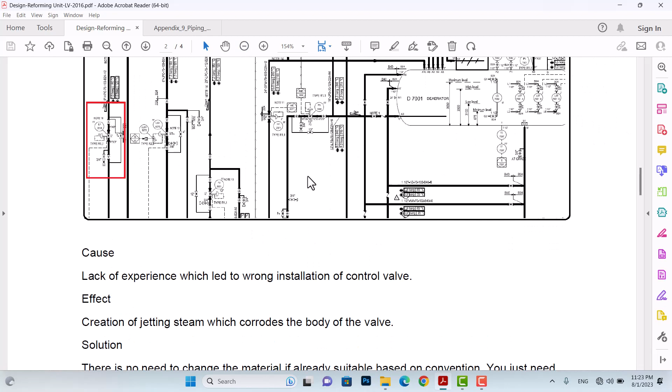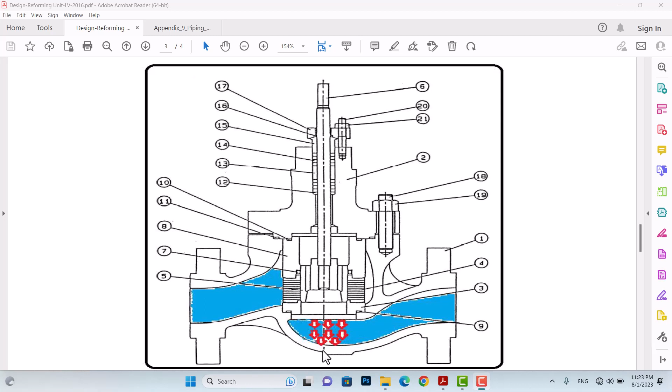You see, this is the control valve. Here we have high pressure condensate at 42 bar gauge, and here is the cage of the control valve. This high pressure condensate passes through the cage, and because of the high pressure drop from 42 to 2 bar gauge, some amount of this liquid vaporizes, producing flashed water. This flash water behaves as a jet of steam, like steam jets, which impact directly on the body of the control valve. Unfortunately, after 6 months in operation, we had a big hole in this section because of these steam jets.

After impacting the body, when the impact and heat of the steam jets is attenuated and reduced, the steam jet gets carried out with the stream of water and goes to the deaerator. So you see, globe valve is not a good type for flashing service because the liquid has to change direction many times, and when this happens we face such problems.

We placed an order, but unfortunately at that time the vendor was not able to give us the angle type, so it took time to provide us with it. In order to attenuate the impact, we made some adjustments on site—QC engineers made some adjustments, and then we installed the valve again. But here we made another change, and it was a good change.

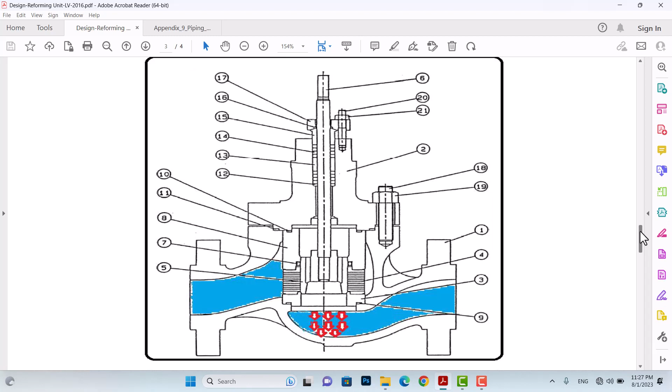You can use this experience for your own control valves. What is this change? If you look at the vendor datasheet, there was a general note written that says when we have gas, the gas should enter the valve under the plug, but when we have liquid, the liquid should enter above the plug. Because of this, this configuration was selected for the project.

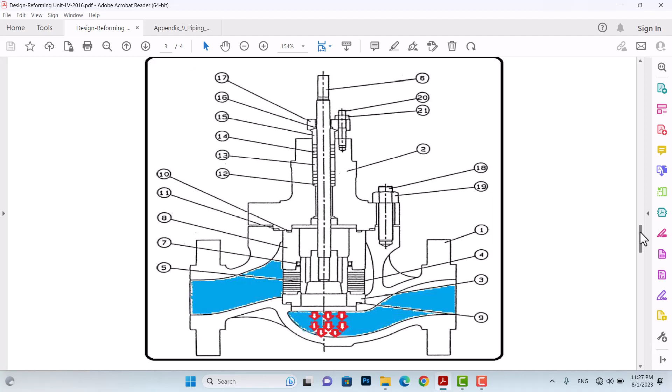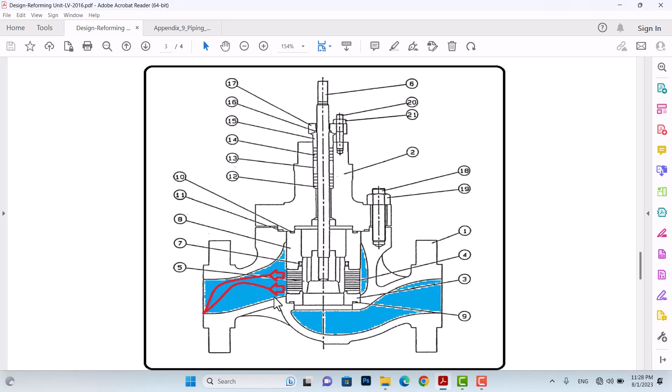But for some special processes and applications, this rule can be overridden. When we have liquid in high flashing services, it is better for the liquid to enter from under the cage. Why? The liquid passes through the cage, and after passing through it, the pressure reduces from 42 to 2 bar gauge. But here, based on physics, the impact of the flashed vapor and flashed water which produces the steam jets is not as high, because it selects a different direction.

Of course, I know that eventually one day it's going to impact and corrode this section, but the impact is much less than the previous configuration. It gave us more than 6 months, and we were able to purchase and install the new valve of the new type.

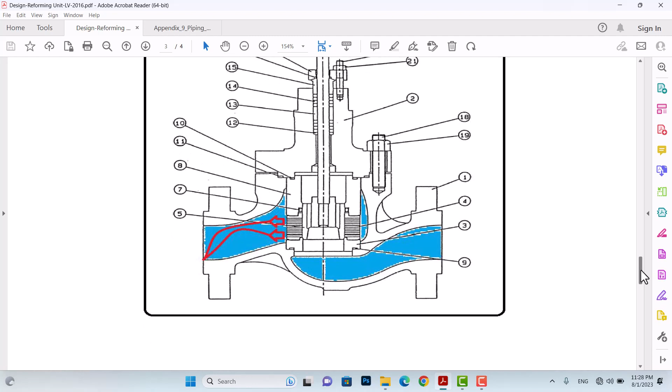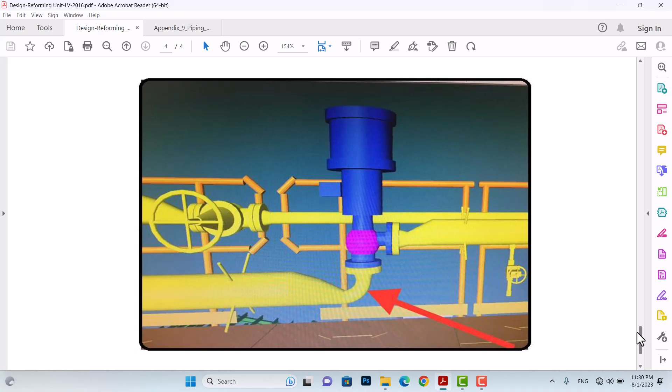Here is our experience and our mistakes. I hope this episode, these mistakes and this experience, will work to the advantage of your career, and that you wouldn't make similar mistakes in your career. Have a good day.